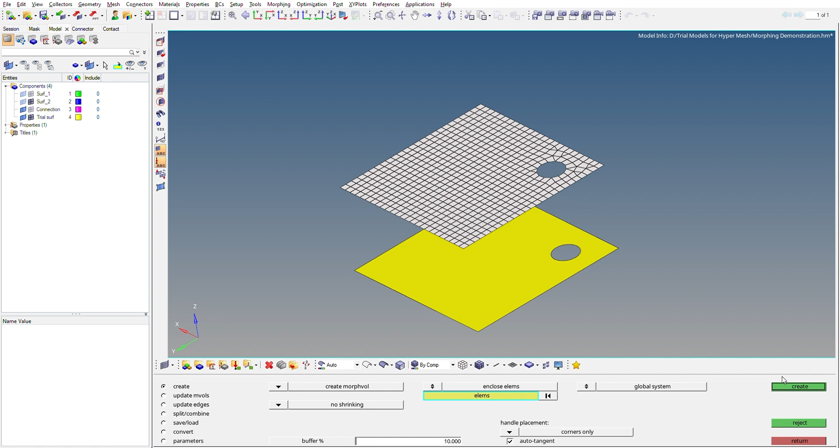We'll go to morph volumes, then go to create, and select the elements. We'll select the elements by face, and then click create. As you can see, we have a morph volume created here.

This green box is the morph volume, and these red dots are called handles. So what are handles? Handles are basically used to change the shape of the morph volume, and we can move these handles to change the shape of the morph volume.

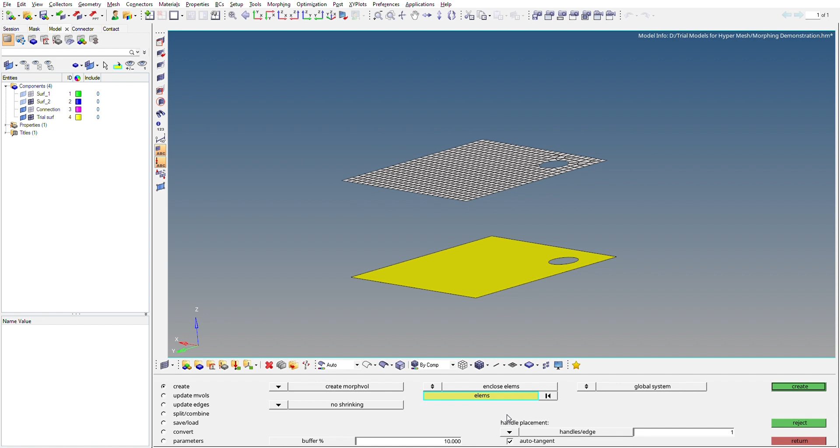We can also change the handle placement. As you can see here, corners only is selected. We'll recheck, and select corners and edges here, and click create. As you can see, handles are created in between the edges also. For this tutorial we'll only go for corners only, and click create.

So we have a morph volume created with handles. You can see it on the left browser here. We have a morphing volume collector and a handles collector. Now how to change the shape of this mesh?

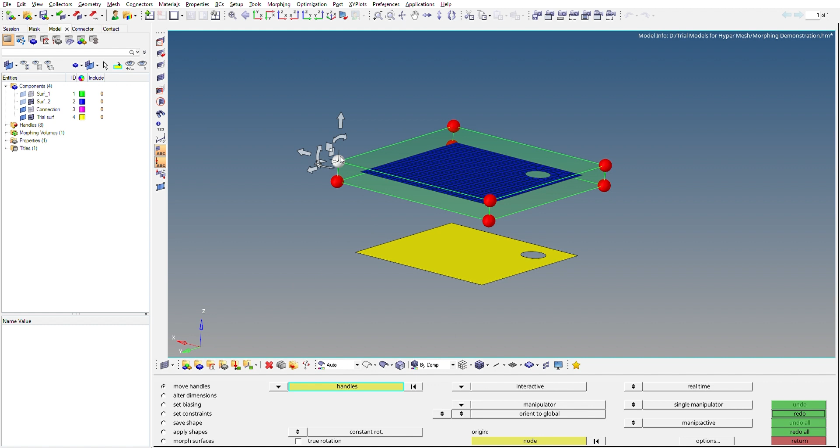For that, we'll go to morph, then move handles, and select the handle. After selecting the handle, we get three arrows here. We can move these three arrows to change the shape of the mesh. As you can see, as I'm moving this, the mesh is coming up.

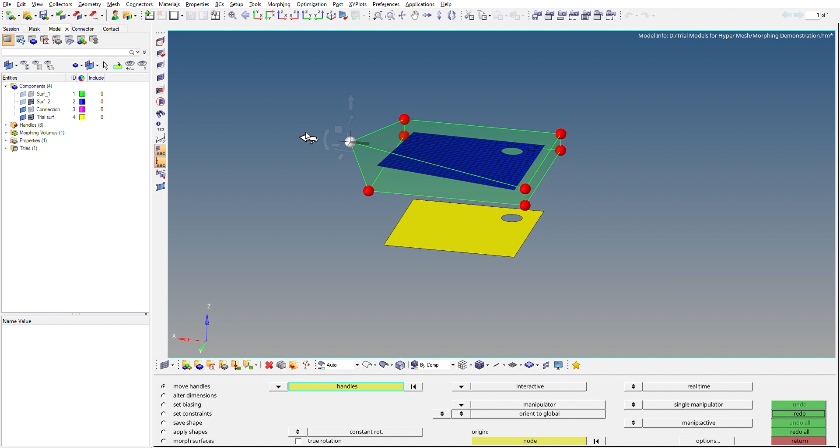We move this to the right side. As you can see, the shape of the mesh is changed. Previously it was flat, now it's kind of out of plane. So this way you can change the shape of the mesh using morph volume and handles.

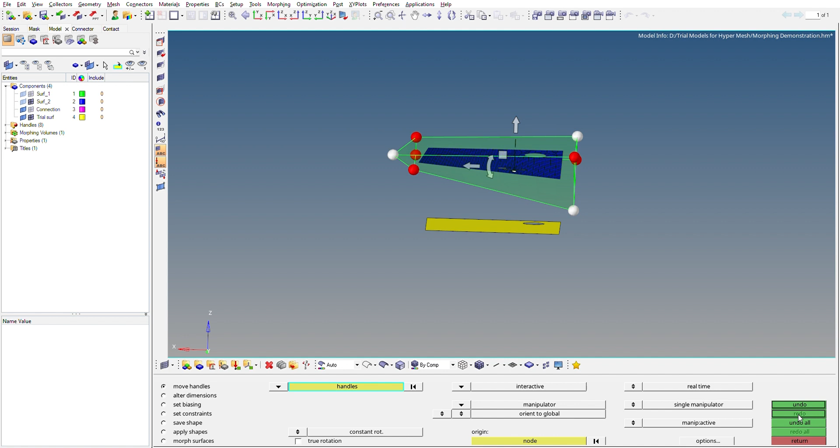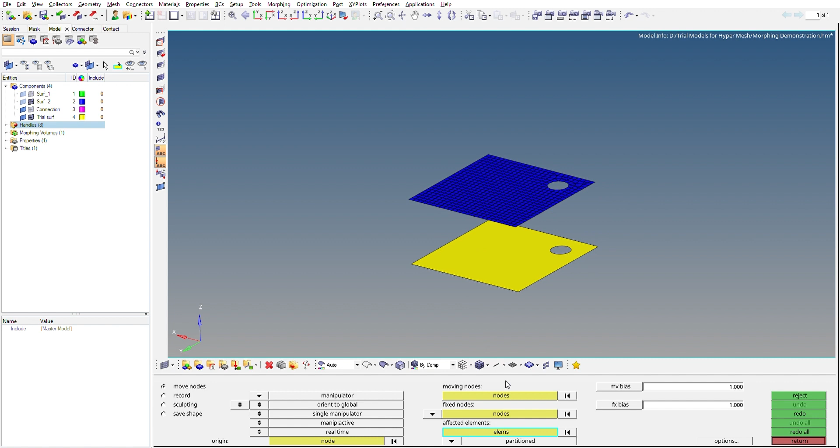Here we have different things. First of all, we have to select the moving nodes. Suppose we select the moving nodes here. Now we'll select the nodes on the edges, going by path. Select here.

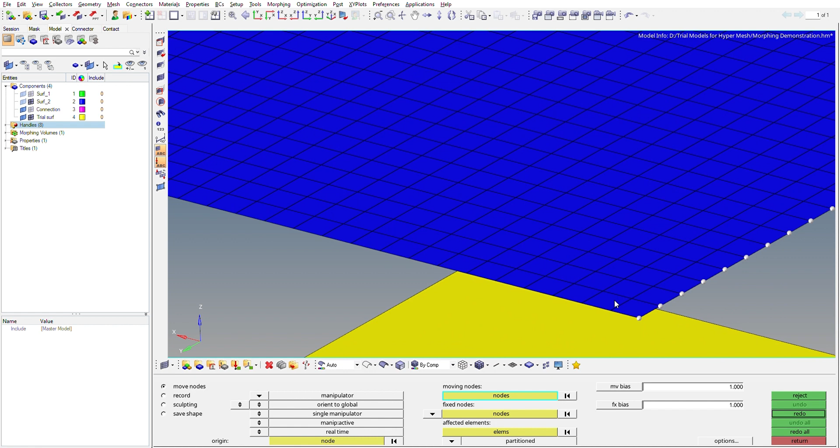Select all the nodes on the edges. So we have selected all the nodes on the edges.

Then we'll have to select the fixed nodes. We'll fix these circular nodes. Select it by path.

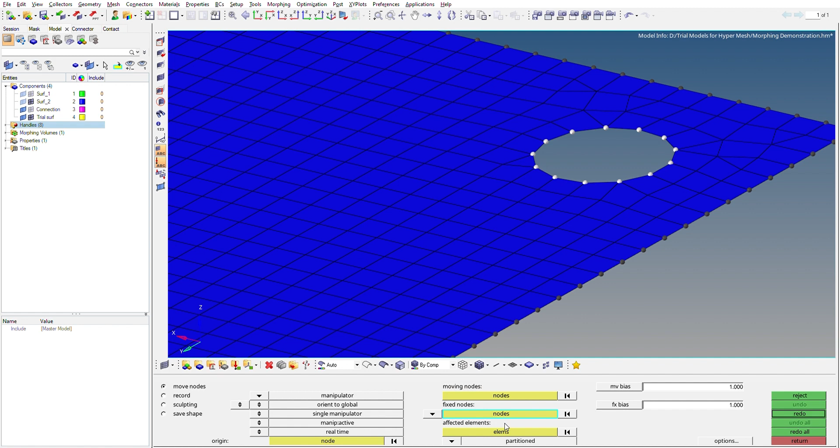Now we have to select the elements which will be moved. For this we'll select the whole face by face. As you can see, the white arrows appear. We can move these arrows to change the shape of the mesh.

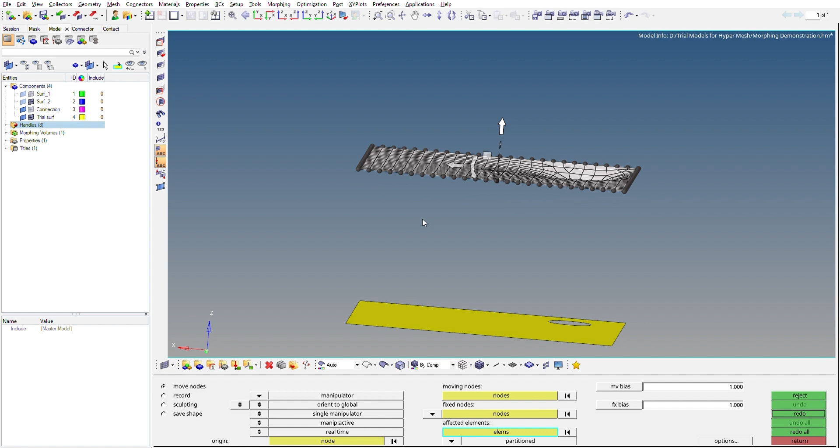Suppose we are moving it up. As you can see, all the elements which are selected are moving, and all the nodes which were fixed, you can see they are fixed, they are not moving. All the other nodes are moving. Nodes which are fixed are not moving. So this is how you can change the shape of the mesh using freehand.

Now next we will see the map to geometry option. In map to geometry, we can map the nodes to a particular geometry. It can be a line, a plane, or a surface. For this purpose, we'll go with line.

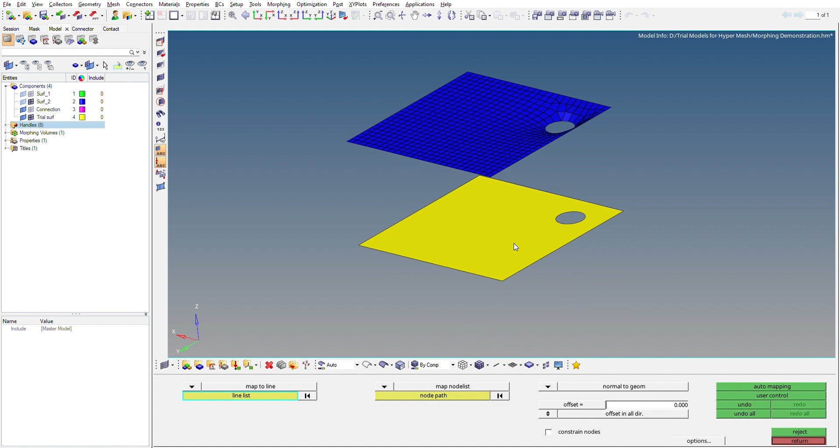We have to select the line list. We'll select this line list. And then we have to select the node path. By path is selected. We'll select the node path.

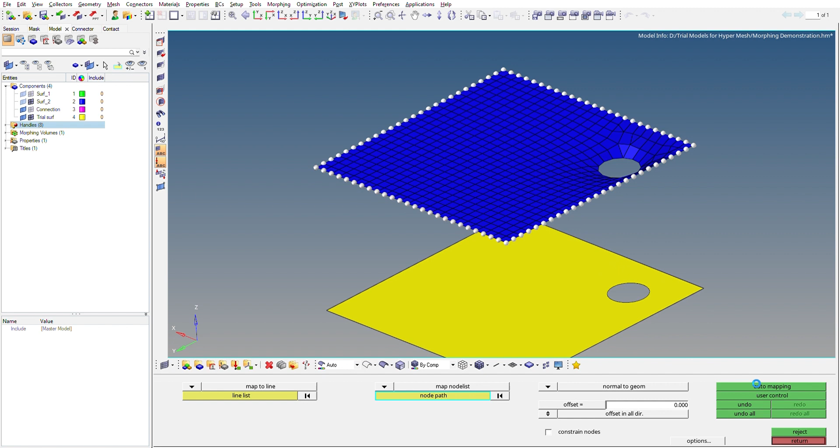And then we'll click auto map. As you can see, these nodes are mapped to the line. So this is the use of map to geometry.

Now, in case you are imagining what are these morph constraints, system, symmetry, shapes: morph constraints are basically used to define constraints before morphing. We can fix some nodes so that they don't move during morphing. Systems are basically coordinate systems which we can define according to our need.

And symmetry, what is that? If you want to change the shape of the mesh by moving handles, and you want to change the shape symmetrically, you can select a particular symmetry about a plane. So when one handle moves, the other can also move, resulting in a symmetric change in the shape of the morph. And shape options you can use to store the morph shapes.